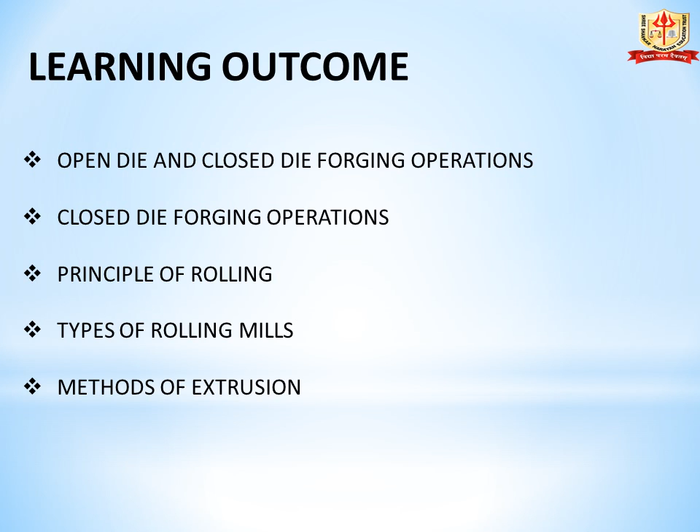We are starting chapter number 4, Forming Processes, part 2. Learning outcome: after watching this video, you will be able to know open die and closed die forging operations, closed die forging operations, principle of rolling, types of rolling mills, and different methods of extrusion.

Now we study open die and closed die forging operations. Forging die is constructed from high-grade carbon or alloy steel and must resist heat, abrasion and pressure. They must withstand severe strains and have a longer wear life under high production conditions. Forging dies are essentially of two distinct designs: first is open die forging and second is closed die forging.

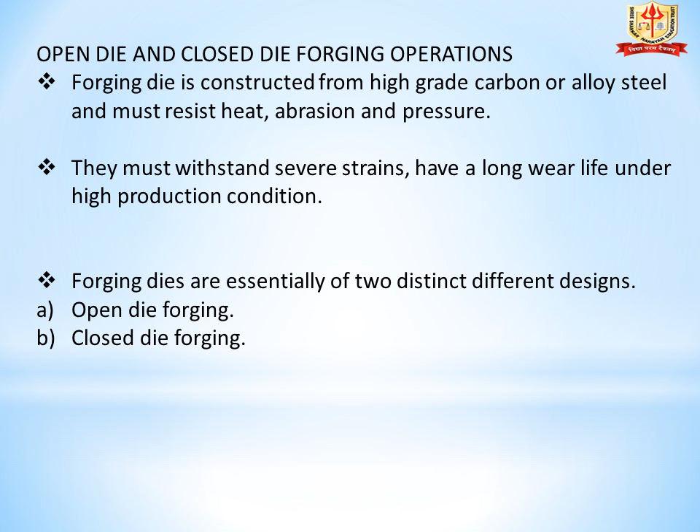In this slide, we study open die forging. In this process, two flat dies are used. Therefore, accuracy depends upon the skill of the operator and the space between the two dies, which is known as a fin. The same dies could be used for producing a wide variety of parts.

If open die is used in a hammer, the process is called hammer forging. If open die is used in a press, it is called press forging. If open die is used in smith forging by hand on an anvil, the process is called hand forging. The operations on open die forging are upsetting, drawing out, bending, piercing and spreading.

Figure 4.2 shows 4 stages in open die forging. As the hammer drops, the material starts flowing in both horizontal and vertical direction. Since there is no restriction to flow of the material in the horizontal direction, the vertical flow will be very low compared to the horizontal flow.

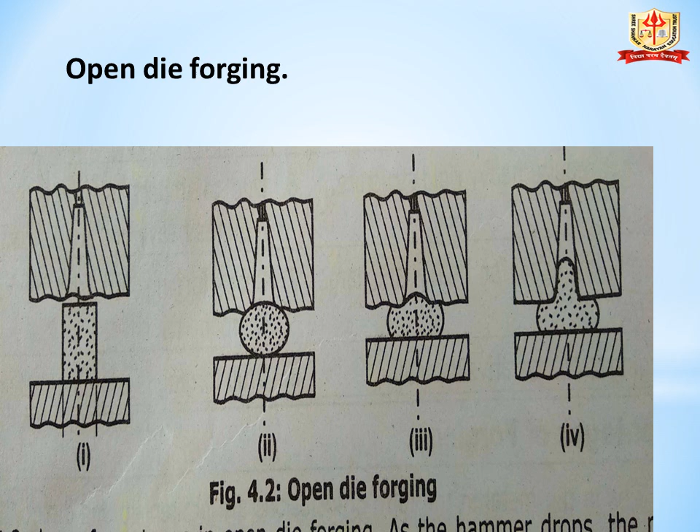In figure 4.2, a hollow punch is used just to show that material does not fill the punch gap fully as it does if you use a closed die. The main advantage of open die is that it is very low cost.

In this slide, we study closed die forging, and its working principle. In closed die forging, cavities or impressions are cut in the die block, in which the metal is forced to take its final shape and dimension. The flow of metal is limited by the surface of the impression.

This forging makes good utilization of workpiece material. The grain flow of the metal is controlled to ensure high mechanical properties. Figure 4.3 shows 4 stages in closed die forging.

As the top die, called the punch, comes down in the downward stroke, the billet, that is the forging material, flows in both horizontal and vertical direction. The vertical height filling is no problem as observed in open die forging.

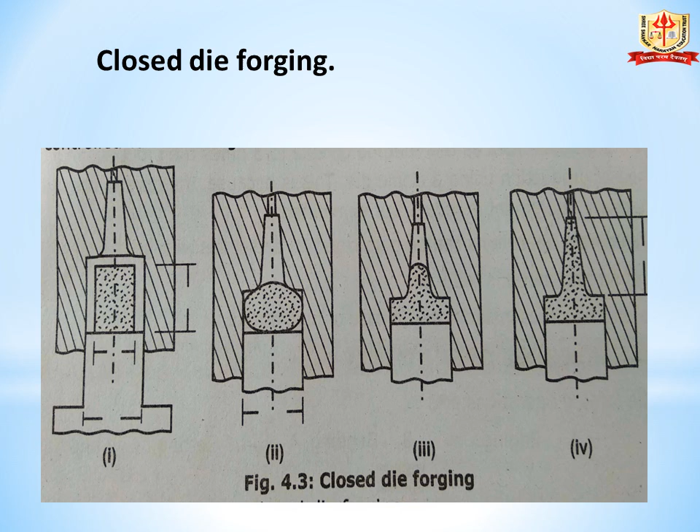In this slide, we study dies used in closed die forging. Dies used in closed die forging may be classified as single impression die and multi impression die.

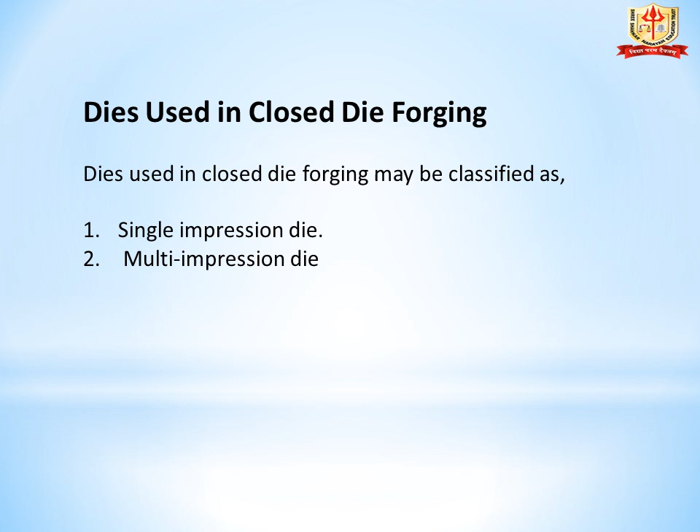Single impression die: this die contains only one cavity or impression, which is the finishing impression. The preliminary forging operations are done by hand or on forge hammer, forging rolls, etc., and only the finishing operation is done in the die cavity.

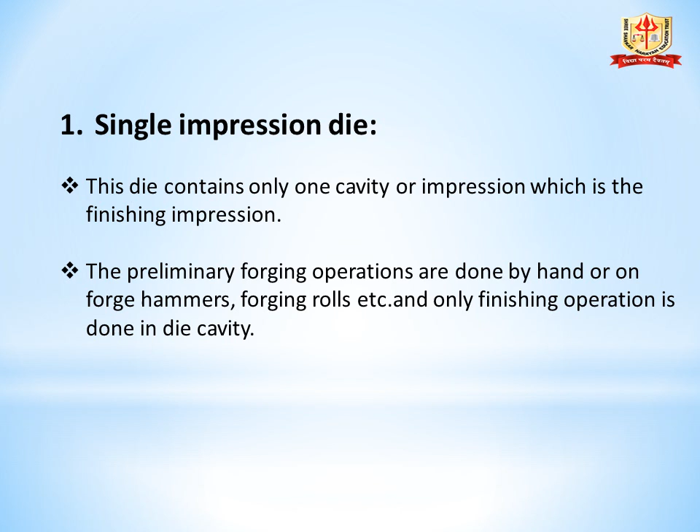The second type is multi-impression die. This die contains the finishing impression and one or more auxiliary impressions for preliminary forging operations. The final shape of the part is progressively developed over a series of steps from one die impression to the next.

Generally, multi-impression dies are very expensive to make and are employed only when the quantity to be made is sufficiently large.

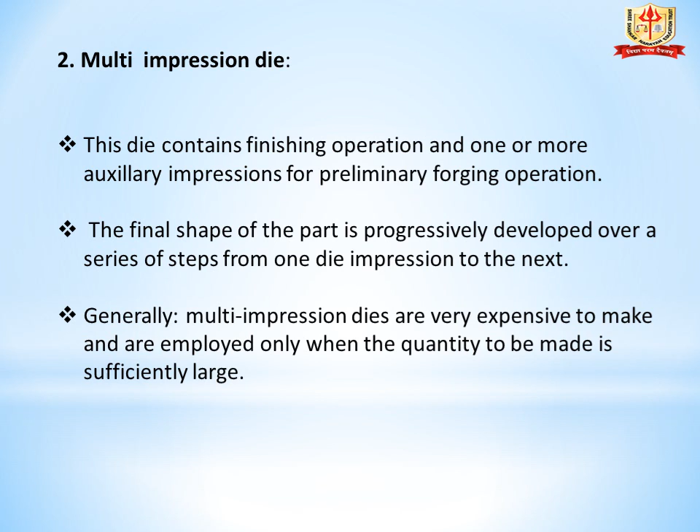Now we study closed die forging operations. Basic closed die forging operations are fullering, edging, bending, setting down and finishing. These are the operations performed in closed die forging.

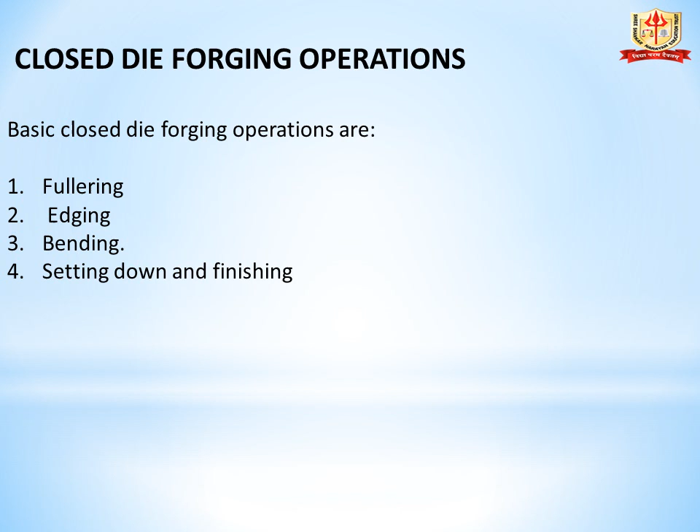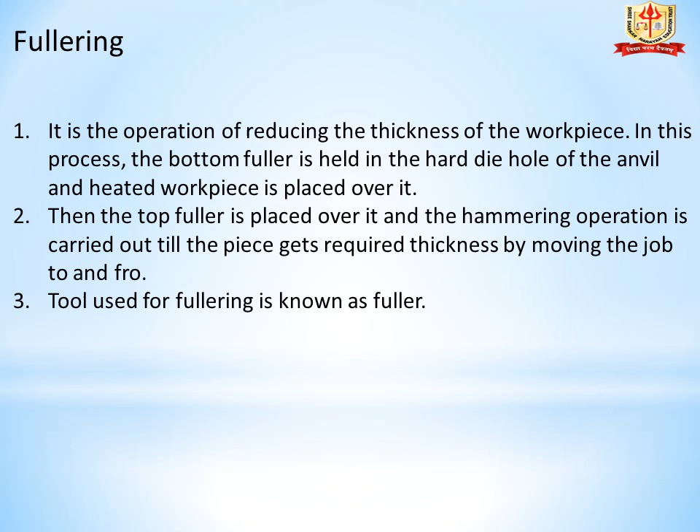Now we study the first operation, fullering. It is the operation of reducing the thickness of the workpiece. In this process, the bottom fuller is held in the hardie hole of the anvil and the heated workpiece is placed over it. Then the top fuller is placed over it and the hammering operation is carried out until the piece gets the required thickness by moving the job to and fro. The tool used for fullering is called a fuller.

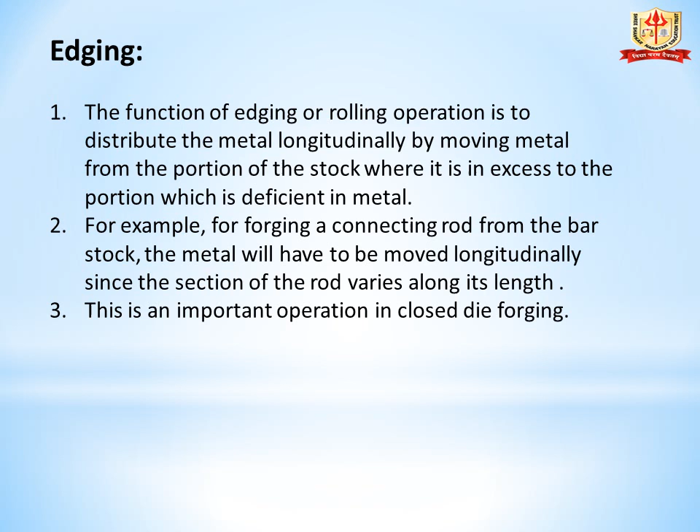The next operation is edging. The function of edging or rolling operation is to distribute the metal longitudinally by moving metal from the portion of the stock where it is in excess to the portion which is deficient in metal. For example, for forging a connecting rod from bar stock, the metal will have to be moved longitudinally since the section of the rod varies along its length. This is an important operation in closed die forging.

The next operation is bending. Bending is done to produce different bent shapes such as angles, ovals, circles, etc., or any desired curvature. For making a right angle bend, that particular portion of the stock which is to be subjected to bending is heated and jumped up on the outer surface.

This provides extra material at that particular place which compensates for the elongation of the outer surface due to hammering during bending. The operation is carried out on the edge of an anvil or the perfectly square edge of a rectangular block.

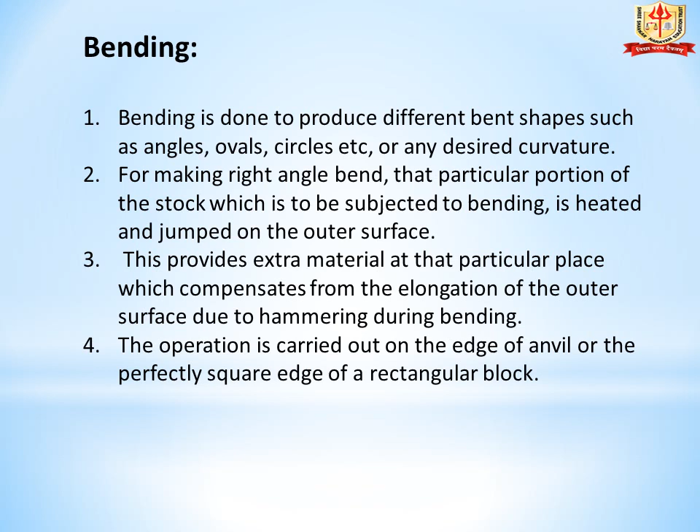Next operation is setting down and finishing. Setting down is the operation through which the rounding of a corner is removed to make it square by means of a set hammer. The face of the set hammer is kept over the round portion formed by fullering or bending, and hammering it at the top.

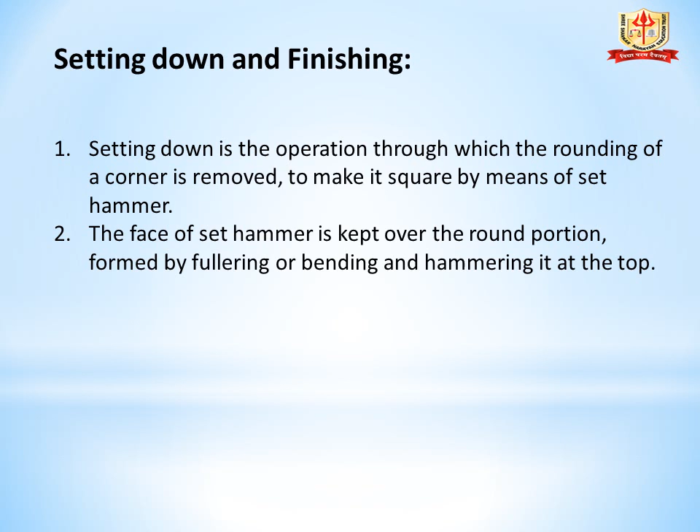Now we study the principle of rolling. The process of rolling basically consists of passing the hot ingot through two rolls rotating in opposite directions at a uniform peripheral speed. The space between the rolls is adjusted to confine the desired thickness of the rolled section, and this is always less than the thickness of the ingot being fed. The roll thus squeezes the passing ingot to reduce its cross section and increase its length.

The diagram shows the changes in grain structure as it passes through the rolls. As a result of squeezing, the grains are elongated in the direction of rolling, and the velocity of material at the exit is higher than at the entry. After passing the stress zone, the grains start refining but tend to retain the shape acquired during rolling. The rolls are in contact with the passing material over a sufficient distance represented by arc AB in the diagram. The angle AOB subtended at the center of the roll by the arc AB is called the angle of contact, or the maximum angle of bite.

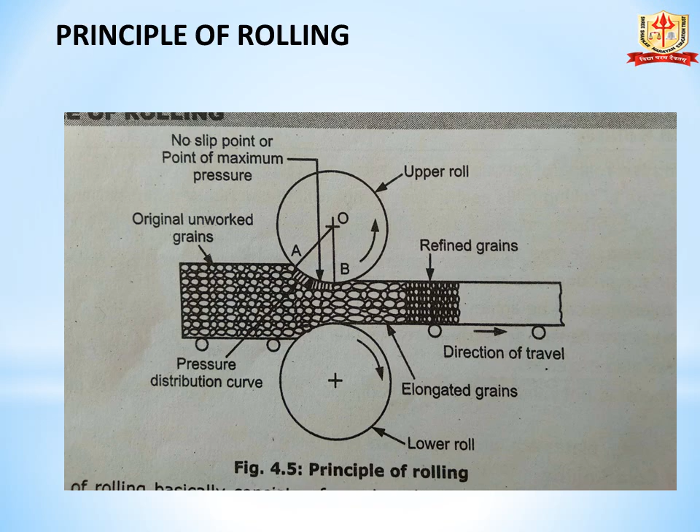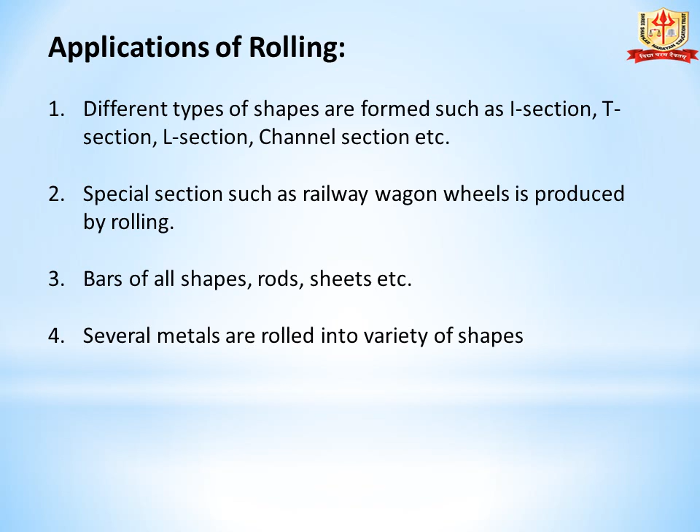Now we study applications of rolling. First, different types of shapes are formed, such as I section, T section, L section, channel section, etc. Second, special sections such as railway wagon wheels are produced by rolling. Third, bars of all shapes, rods, sheets, etc. Fourth, several metals are rolled into a variety of shapes.

Now we study hot rolling. Before metal can be mechanically worked, it is cast into ingots. These ingots are changed into rectangular, square or round cross sections of various sizes, which are called billets. The billets are pressed through rolls to reduce their size at a temperature more than the recrystallization temperature; this is called hot rolling. A large number of useful articles such as plates, bars, and structural sections like T section, I section, channels, etc. are produced.

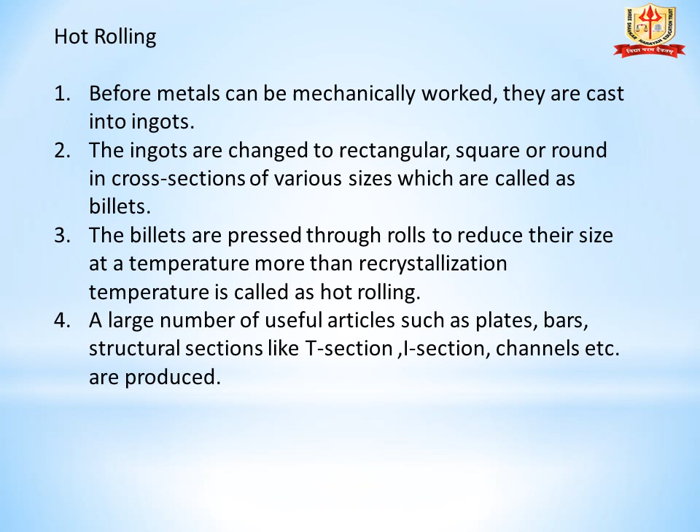Now we study cold rolling. Cold rolling is the rolling of metals below its recrystallization temperature. The same type of rolling mills used in hot rolling can be used for this. Some extra advantages obtained with cold rolling are: it produces an oxide-free surface, the surface produced is smoother and bright, close tolerance can be achieved, toughness and tensile strength increase due to work hardening, and hardness also increases.

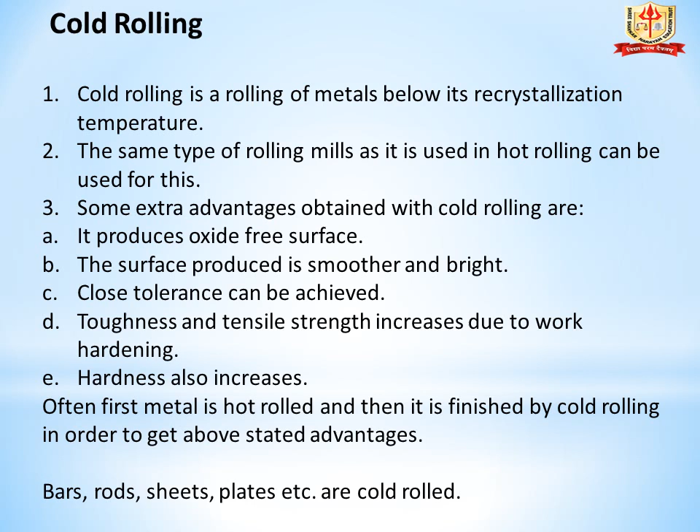Often, metal is first hot rolled and then finished by cold rolling in order to get the above stated advantages. Bars, rods, sheets, plates, etc. are cold rolled.

In this slide we study types of rolling mills. Types of rolling mills are: first, 2 high rolling; second, 3 high rolling; third, 4 high rolling; fourth, cluster mill; and fifth, continuous rolling mill.

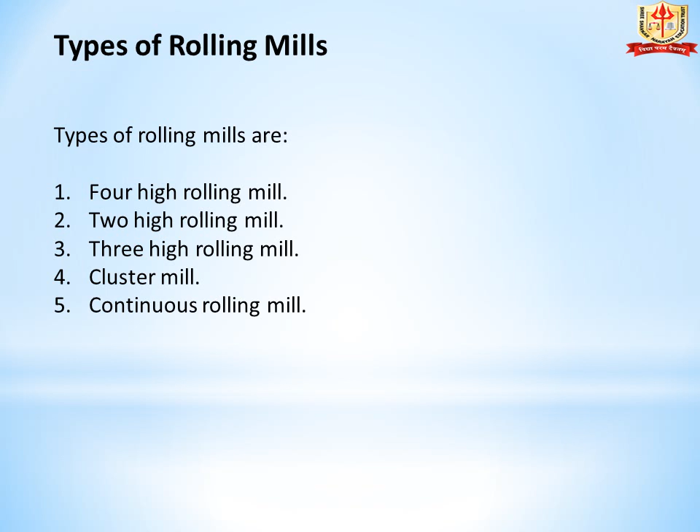First type of rolling mill is 2 high rolling. It consists of two heavy horizontal rolls placed one over the other. The rolls are supported on bearings housed in sturdy upright side frames called stands. The space between rolls can be adjusted by raising or lowering the upper roll; the position of the lower roll is fixed. Both rolls rotate in opposite directions to one another, and their direction of rotation is fixed and cannot be reversed. Thus the work can be rolled by feeding from one direction only. The 2 high roll mill is normally employed for initial rolling of an ingot.

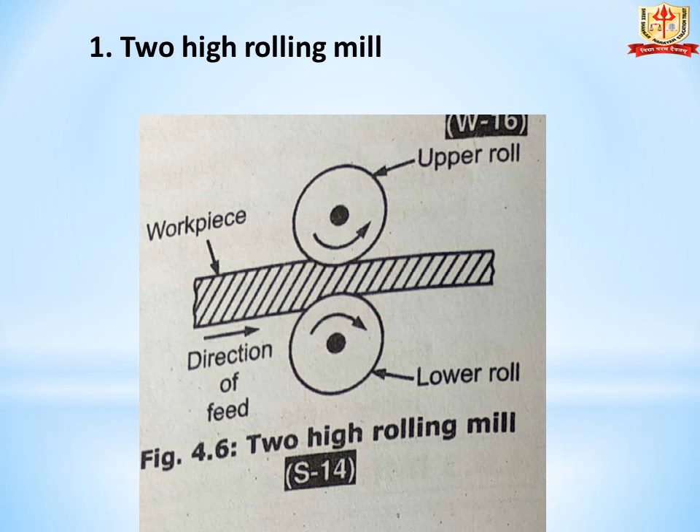Now we study 3 high rolling mills. It consists of 3 horizontal rolls positioned directly one over the other. The direction of rotation of the upper and lower rolls is the same, but the intermediate roll rotates in a direction opposite to both. All 3 rolls continuously revolve in the same fixed direction and are never reversed. The workpiece is fed in one direction between the upper and middle rolls, and in the reverse direction between the middle and lower rolls. Many pieces may be passed through the rolls simultaneously, resulting in a higher rate of production than the 2 high mill. This mill may be used for blooming, billet rolling, or finish rolling.

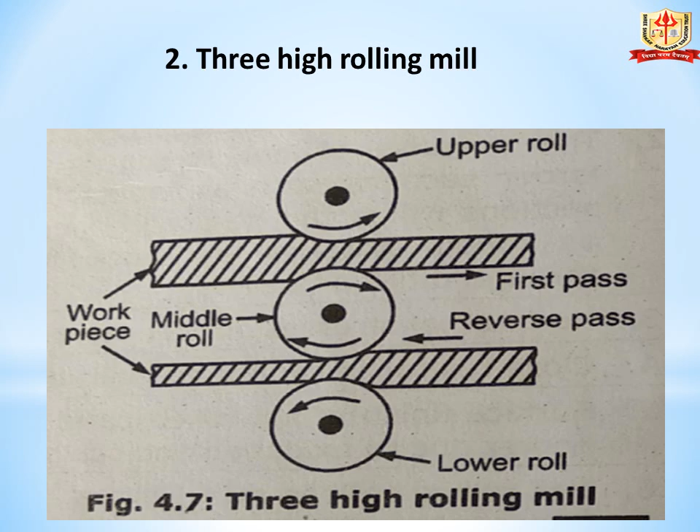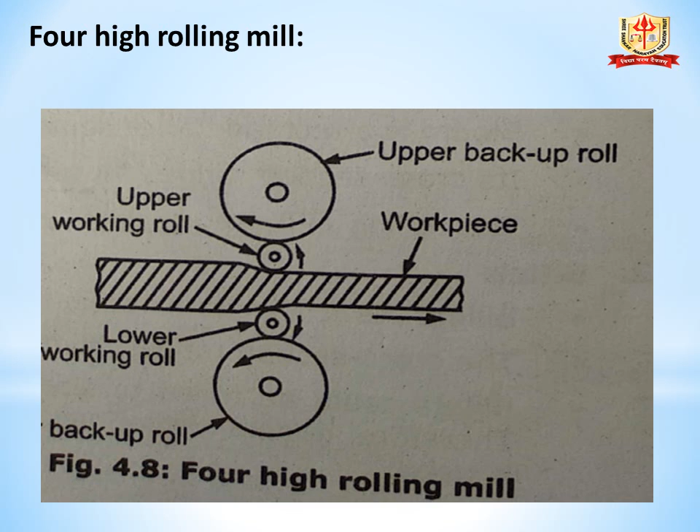Now in this slide we study 4 high rolling mills. It consists of 4 horizontal rolls, 2 of smaller diameter and 2 of larger diameter, arranged directly one over the other. The larger diameter rolls are called backup rolls, and their main function is to prevent deflection of the smaller rolls, which otherwise would result in thickening of rolled plates or sheets at the center. The smaller rolls are known as working rolls, and they concentrate the total rolling pressure over the metal. These mills are generally used for subsequent rolling of slabs. The common products of this mill are hot or cold rolled sheets and plates.

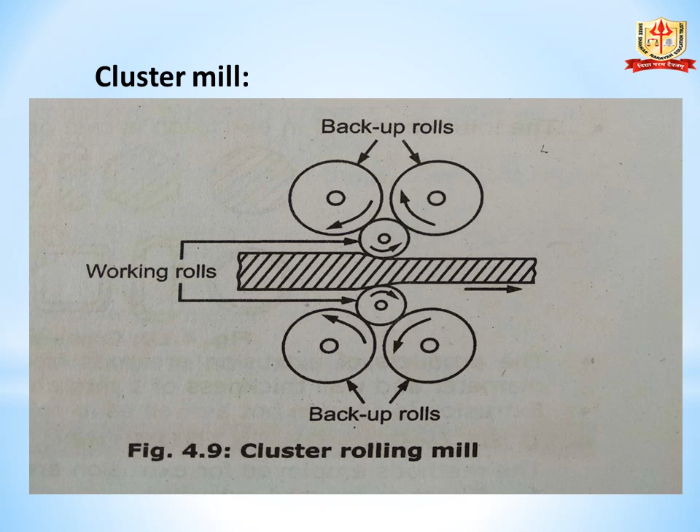Next type of rolling mill is the cluster mill. It consists of 2 working rolls of smaller diameter and 4 or more backup rolls of larger diameter. The number of backup rolls may go up as high as 20 or more depending on the amount of support needed for the working rolls during operation. This type of mill is generally used for cold rolling.

Next type of rolling mill is continuous rolling mills. First, it consists of non-reversing 2-high mills arranged one after the other so that material can be passed through all of them successively. Second, the roll of each successive mill stand rotates at a faster speed than the preceding roll in order to accommodate the increasing length of the metal piece being rolled. Third, this arrangement facilitates very rapid production because the component passes continuously from one stand to the other until it reaches the final pass.

Fourth, but this is suitable only for mass production. Fifth, for smaller quantities, quick changes of setup will be required and it will consume a lot of time and labor. Sixth, as the speed of rolls on each successive stand varies, it is necessary that their respective surface speeds be calculated carefully.

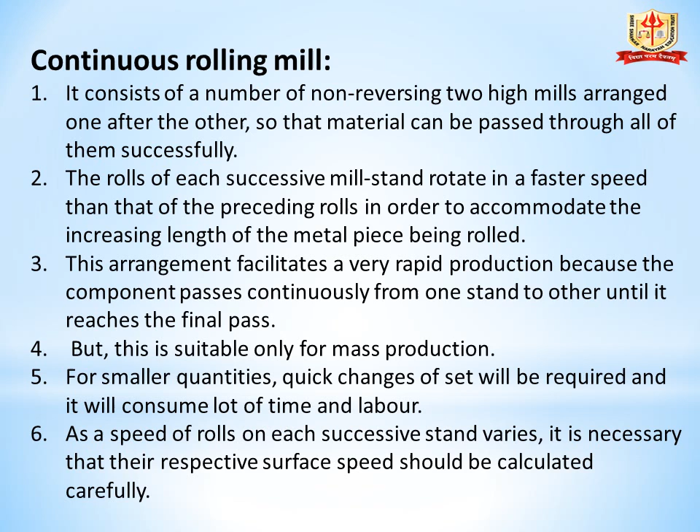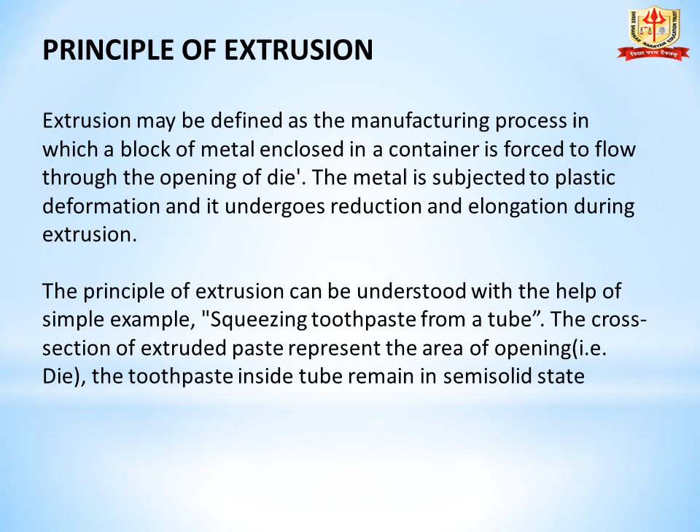Squeezing toothpaste from a tube. The cross section of the extruded paste represents the area of the opening, that is the die. The toothpaste inside the tube remains in a semi-solid state.

There are three methods of extrusion. First is direct or forward extrusion. Second is indirect or backward extrusion. And third is tube extrusion.

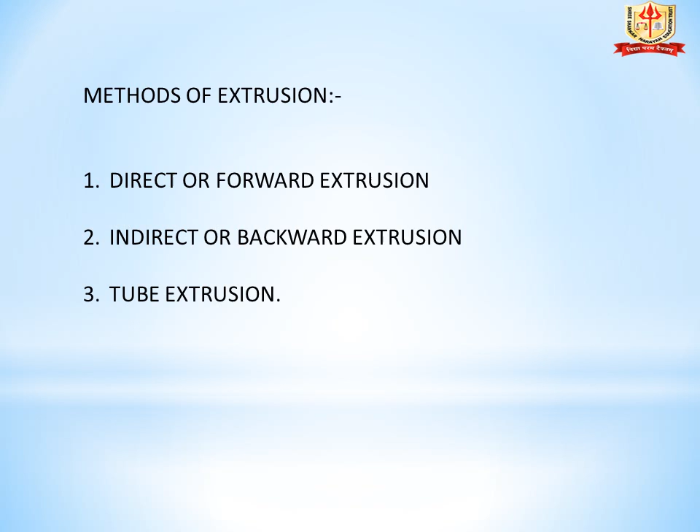Now we study direct or forward extrusion. A heated round billet is placed in the container. The dummy block and ram are now positioned properly. As pressure is applied, the extruded metal comes out through the die. The pressure is withdrawn when nearly 10% of the billet remains in the chamber.

This portion is called discard. The length of the extruded part will depend on the size of billet and cross section of the die. The extruded rod is supported on a run-out table. In this process, we can see that the metal is extruded in the direction of the applied force, hence it is called direct or forward extrusion.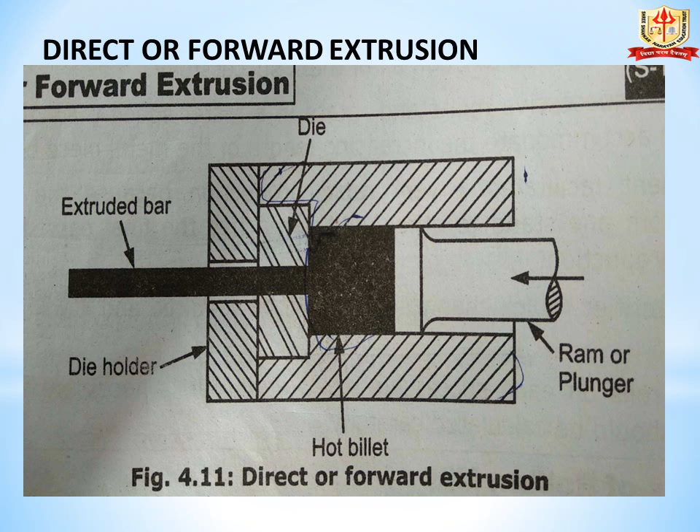As the billet does not move inside the chamber, there is no friction between them. Therefore, much less force is required in comparison with direct extrusion. More complicated equipment is required because the plunger becomes weak due to the reduction in its effective cross sectional area.

Advantages of indirect extrusion: 25 to 30% reduction of friction, allowing extrusion of larger billets. Second, an increasing ability to extrude a smaller cross section. Third, less tendency of extrusion to crack as no heat formation takes place from friction. Fourth, container liner lasts longer due to less wear. Fifth, more uniform use of billet ensures that extrusion defects and coarse grained peripheral zone issues are less. Sixth, lesser time is required.

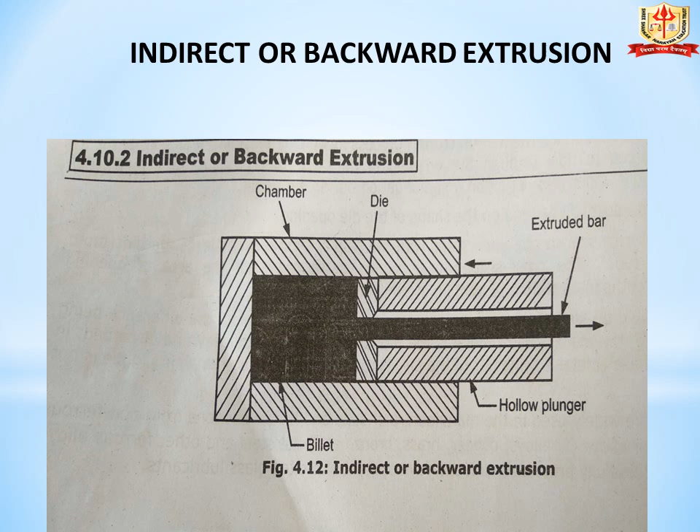Now we study applications of indirect extrusion. First application is making tubes, pipes and rods. Second, aircraft parts. Third, channel section, I section, Z section. Fourth, to produce a variety of cross-sectional shapes such as circular, square, hexagonal and rectangular. These are applications of indirect or backward extrusion.

Advantages of extrusion: the range of extruded items is very wide. Cross-sectional shapes not possible by rolling can be extruded. Second, no time is lost while changing the shape since the dies can be easily removed and replaced. Third, dimensional accuracy of extruded parts is superior to rolling. Fourth, very large reduction in cross section is possible as compared with rolling.

Fifth, automation in extrusion is simpler. Sixth, smaller parts in large quantities can be made. Seventh, extrusions are lighter, more sound and stronger than castings.

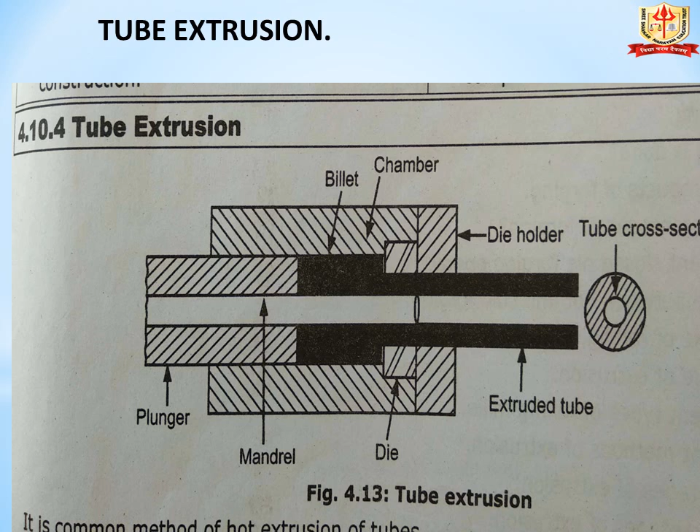Then we see applications of tube extrusion. First is working of poorly plastic and non-ferrous metals and alloys. Second, manufacture of sections and pipes of complex configuration. Third, medium and small batch production of tubes. Fourth, manufacture of parts of high dimensional accuracy with constant cross section. These are some applications of tube extrusion.